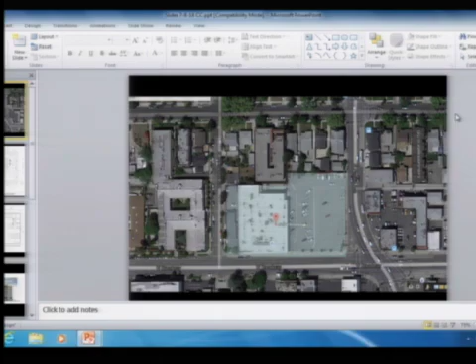The proposed project is a 5-story mixed-use building with approximately 18,200 square feet of commercial space on the ground floor and 180 multifamily residential units above, surrounding a central courtyard. The building is tallest at 5 stories starting at Broadway, then steps down towards the north to 4 and 3 stories adjacent to the multifamily zoned properties along Wilson Avenue.

The developer plans to request a density bonus for the project pursuant to SB 1818, and I need to make a correction to the percent of affordability as stated in the staff report. The developer plans to provide 5%, not 11%, for very low-income households, therefore qualifying the developer for 1 concession. In this case, the developer is requesting an increase in height and stories for the project, to 65 feet, 5 stories, where 60 feet, 4 stories are permitted.

So 5% is how many units? 180 units -- no, 5% of 180, so how many is that? Approximately 9. Thank you. Formal consideration of this request would be considered at the Stage 2 design submittal.

Additionally, the code requires 313 parking spaces. The project will provide 330, located in a single-level underground parking structure and at the ground floor. 2 vehicular ingress-egress points are proposed, one along Pacific Avenue and one along Broadway, that would access the at-grade parking level, and access to the subterranean parking will be provided from Kenilworth Avenue.

Staff recommends approval of the Stage 1 conceptual design review with direction to the applicant to further refine the project consistent with comments from the city's senior urban designer. This concludes staff's presentation. I'd like to turn the rest of it over to the project team, who will go into the project design in more detail.

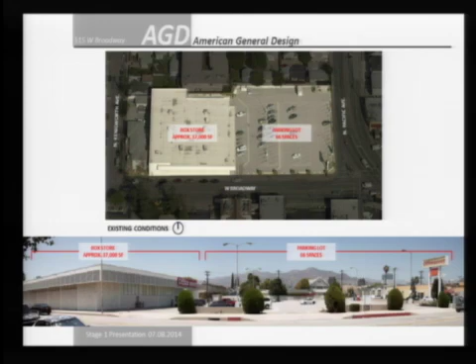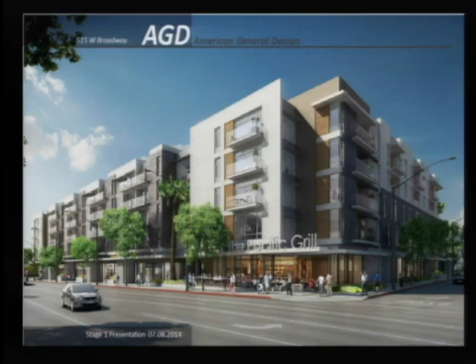Flip back to the first shot, talk a little bit about the overall idea for the project. All of these projects go through a long process of development and adjustments to try to make it fit with the local context as well as the development goals for the project. One of the things we really noticed on this site was the opportunity for an anchor and imagery at the corner of Broadway and Pacific. We really look at this end of the project as being much more in terms of commercial development, and we'll speak a little more about the residential development that's a little further down the block.

Just a little background information: the calculations lead us to 188 units, and in this particular configuration we would be allowed a 20% bonus, but we're actually using just about 15% of that bonus. The additional 8 units we found would make it quite difficult for us to step the mass of the building adjacent to the properties on the north of us. So we've eliminated those units from the project.

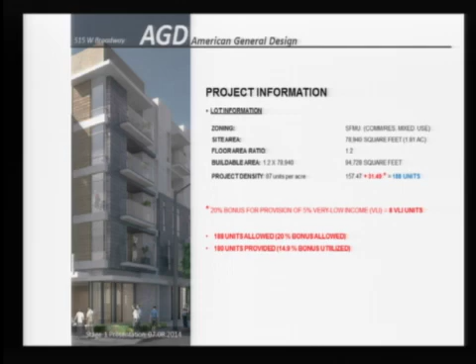Project program: you can see the overall gross area of the building is a little over 350,000 square feet, and unit count as it works its way through—I'll show you a little more detail on this. In terms of the number of parking spaces, as spoken by staff, we're required to have 313, and we're going to be providing 330 spaces.

The unit count we're looking at is 60 units. One thing to note is that in all of our developments we tend to go to a higher standard and higher quality in terms of the value of the property, with our 2 bedroom units being as large as 1,600 square feet.

The 1 bedroom units, which come in a number of different configurations, average around 900 square feet. The smallest studios are around 750 square feet, with the bulk being about 850 square feet, which we generally find to be the size of 2 bedroom units in most other competitive developments of this type.

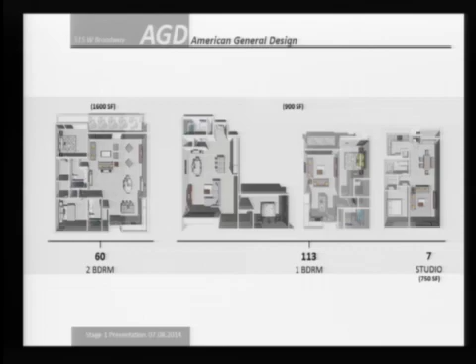The other thing to take a look at is the open space being provided. We're providing in excess of the required amount of open space, roughly two-thirds of an acre on the site. We find that's important for the community, and specifically for the quality of life of the individuals purchasing or renting these units.

Let's talk a little about our philosophy in terms of sustainability and the aspects present in this particular project. First and foremost, it's a mixed-use development. A lot of our background is in transit-oriented development, which we're doing in downtown Los Angeles as well as Pasadena. The idea of live, work, and proximity to mass transit is important to us.

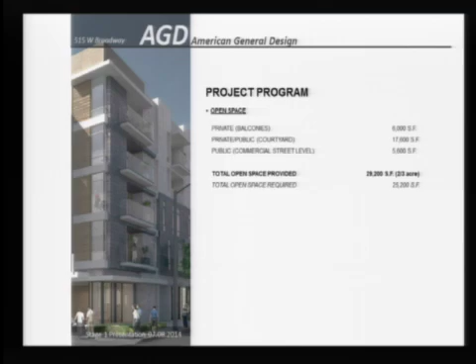While we don't have a train line here, we are along a major bus corridor on Broadway. We're looking at live-work opportunities as well, in particular some units along Kenilworth Avenue that are accessed from the ground floor.

Throughout the building we've considered sun control and solar aspects. The building has been elongated along an east-west axis, which is optimal, with deep recesses to shade the glass on virtually all sides of the building where we have the majority of our glazing.

All glazing is thermal pane, thermally broken, double pane glass, and we provide sun shading in various places where it's optimal to do so.

We look at virtually everything we do in terms of drought-tolerant California natives, and the reuse of gray water systems that feed into irrigation.

We also focus on using recyclable materials. It's common to see wood construction, but wood is actually a renewable resource and is recyclable. A lot of the lumber we're using in current construction is made up of small pieces, assembled manufactured lumber that comes from recycled materials. We're also looking at using metal paneling, which is a recyclable material.

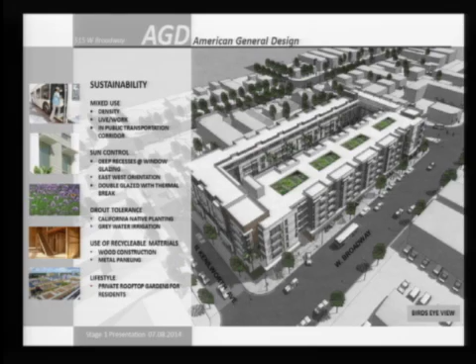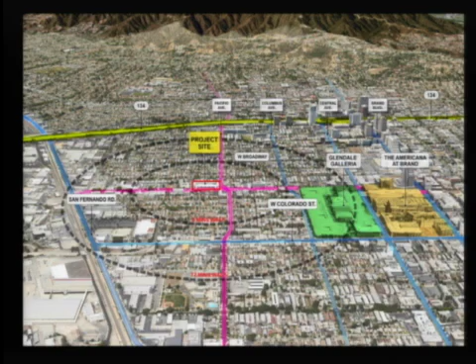Further, we've pulled the building back, and as we talked about, the loss of 8 units principally came out of the design in this area. We go anywhere from 9 to 10 feet, to 21 feet, and as much as 40 feet in terms of the distance, and we have another image that will show that.

Can I ask you a question? Sure. What is on that side? Excuse me, what are the buildings on that side? I'll show you an image in just a second that talks about them.

They range from single-family residences, where the garage is up against the back of the property, to rather significant multifamily residences backing up against it. So all the single-family residences have their garages between the back of the building and the property line. Right.

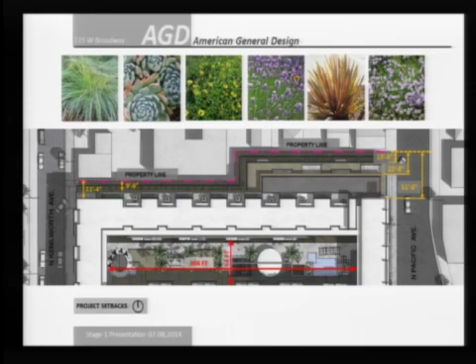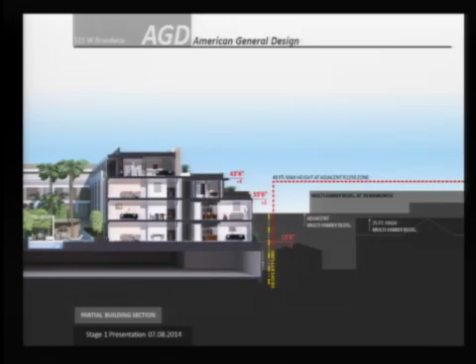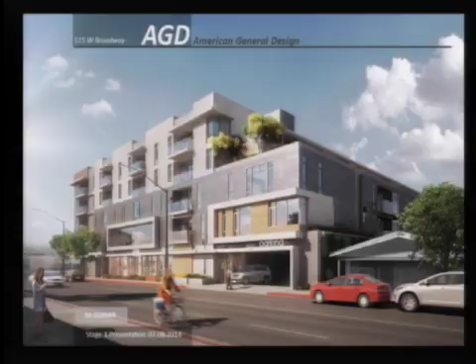Let's talk a little bit about how the ground floor plan is organized within this. We're actually looking at the commercial entrance coming in off Pacific. This is entry in only, will not be exiting back out onto Pacific. We understand the traffic constraints that are along Pacific. We have in and out both off of Broadway, down adjacent to where the residential portion of this is. See the commercial uses that wrap around, 118 parking spaces, and then a courtyard that goes through in terms of providing access from the parking back out to the street for each one of these retail components.

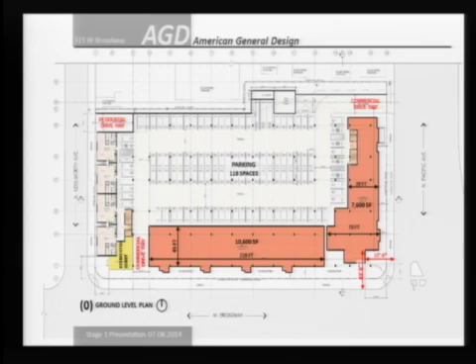One of the things I think is interesting that was able to be achieved on this site is that many developments we see have very token kinds of depth in terms of retail space along the streets. In this particular case, we've got everything from 45 feet down to, say, 30 feet. But we find these to be depths that are rather appropriate and are very leasable and sustainable economically in terms of tenants that would come in. And we're really looking at the corner of this in terms of having a major tenant come in for a restaurant cafe space with outdoor dining that we can see in the images.

Let's talk a little bit about our attitude along Kenilworth Avenue. Kenilworth is where we have our access down to the residential, so the residential access parking is completely segregated from the commercial. We have the development of 4 live-work units that are accessed directly off of the street along Kenilworth. We didn't feel that it was appropriate, with the convalescent hospital and other residential uses, to have commercial activities along Kenilworth. So this worked out well for us in terms of our design strategies.

Parking down below, parking access up into the units from 2 distinct locations on opposite sides of the site, and a ramp that goes back up to grade.

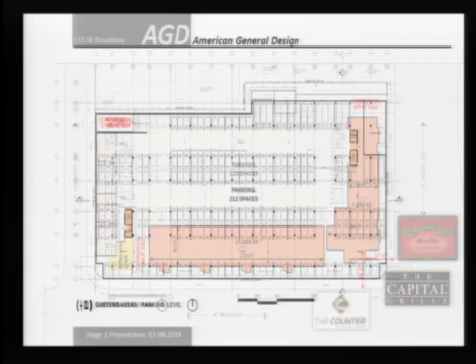One of the things that staff asked us to look at is that currently there's a right turn lane at the corner of Pacific and Broadway, and one of the things we have investigated is whether or not there's the possibility of filling that in and creating a courtyard that gives a little greater emphasis to the commercial development that would happen at the corner.

How much more time do you have? Like 2 minutes. Okay, 2 more minutes.

Kenilworth elevation. Just a quick note on materials. Since we do our own development, design, and construction, the quality of the buildings is very important to us, and the variety of materials we put into the projects matters. Of significance is that we tend not to use vinyl-clad windows or windows that sit flat along the surface. We like to recess the windows back to get lots of shadow and texture depth within the project, and this illustrates where some of the potential material selections will go.

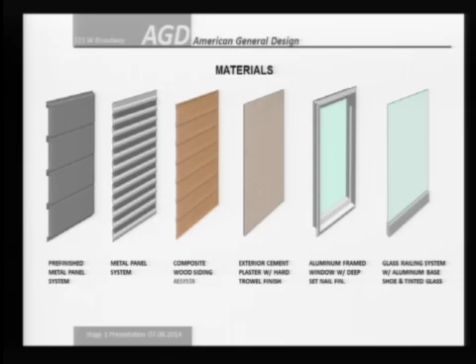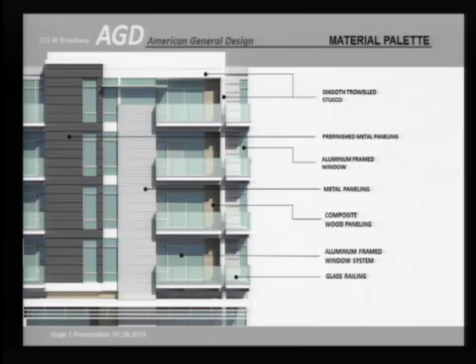Can I ask a question about your landscaping? Certainly. Why the palm trees? Why not something that provides some shade and some blockage so people aren't looking from one window straight across into the next window? Shade is not necessarily that big of an issue for us since this winds up being a fairly narrow configuration.

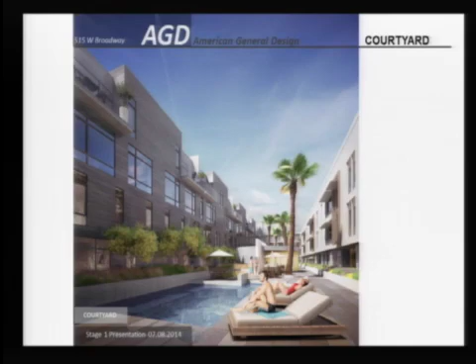What we've done is locate our planting along this side with species that can tolerate the shade, so we get plenty of shade principally across this side, and double that. It's definitely possible we could look at a different species that leafs out more, but in this case we prefer less ground shade and something vertical in the space, which helps break up the length of the space.

Well, I just think you should consider something that provides some greenery, because the palm trees don't - they're just like a telephone pole. And then you have your units right across from each other, so you don't really have any blockage from someone looking out one window. They'll look right into the window across from them. It's not very far, and it might soften your space to have some foliage when people look up or through that space. So something to think about.

Okay, well we could certainly consider deciduous planting that would allow us to get shade in the summertime, but then would allow us to maximize the light in the winter.

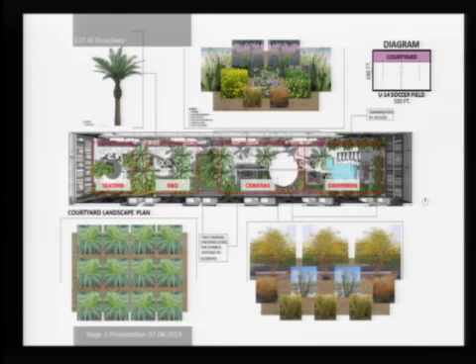Are you going to be able to plant? What's the depth of the planter box for you? Fortunately, we're in pretty good shape because we've got the parking deck below us, and we've actually got space for the swimming pool to have depth. So we're probably looking at a planter box that's going to be at least 4 feet, plus another foot or so above that around it. So we'll probably be looking at a 5-foot root ball at least.

Other questions I'd be happy to answer. No questions? Thank you.

This is the rear elevation, which I don't think you're addressing. Yeah, no, I'm not crazy about that. This is the Pacific elevation, the frame around that common recreation room I mentioned. Through the balconies, the rhythm of the balconies, and the ins and outs of the facade, this does relate to the front facade. What it doesn't have is the vertical emphasis that the facade on Broadway has.

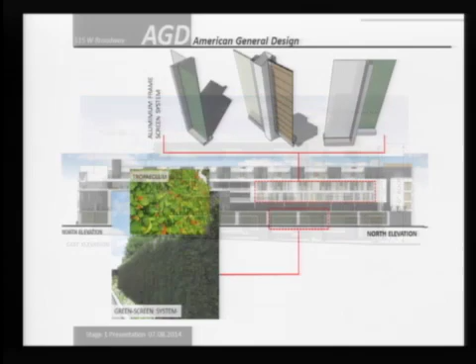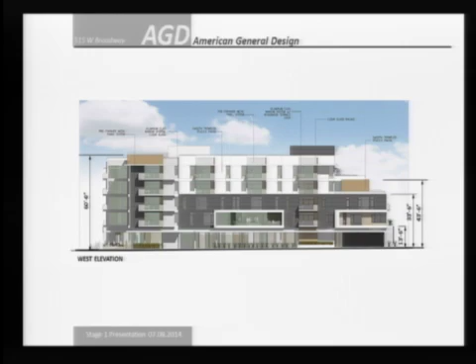So where's the south? Let me get over to that. Here you are. So here you have these ins and outs, these vertical recesses with balconies, these areas clad with metal cladding in those locations. Those are all the balconies. This was probably the hardest facade to detail because of the length of the building, and how important it was to avoid an overwhelming, looming presence. We thought they successfully addressed that through the use of materials and changes of plane.

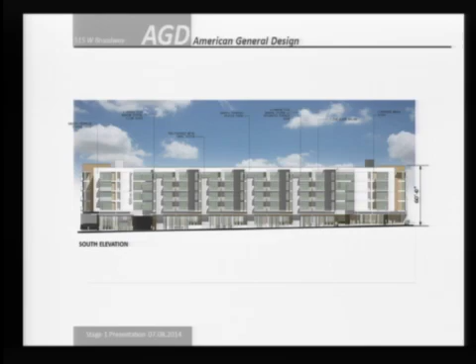So those are all... and you know, on a tangent, in relation to balconies, I saw on Central, on the Lex on Orange, someone hanging their laundry out over the balcony. Is that permitted? Do we have a code on that? I don't think so. I was really upset by that. We can put a condition in their lease agreements that it's not allowed, and I believe we've done that in the downtown projects. We can take a look on Lex and Orange.

Code enforcement. Okay, so you're saying that although they're different, they incorporate some of the same materials, and that doesn't bother you? No, because the material palette kind of... if it bothered you, you would say something. We wrote a nice report for you saying we support the project. We think it's actually a very thoughtful design, and we think buildings should respond to their immediate context with subtle changes. Maybe this isn't subtle enough for what you're hoping for, but we thought it was successful.

Okay, thank you. Mr. Jerry, Mr. Quintero? Yeah, I support the project.

I was right around the corner near the Homenetmen office for many years, so I'm very familiar with the site. I remember when it was a grocery store, and within it was a La Majun place I went to, where I'd try to talk him into going statewide with his wares, but he never did. So I think this is an upgrade. I like the design, and the fact there's quite a bit of commercial. I think that site will absolutely support the commercial, and if you can get a restaurant in there, I think it will do very well and improve the ambiance in the neighborhood.

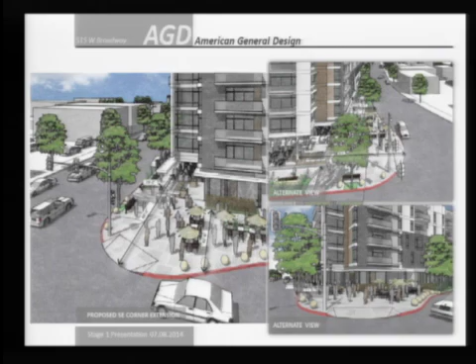I'll move 3A. Second. Roll call, please. Council members: Friedman? Yes. Najarian? Yes. Quintero? Yes. Weaver? Aye. Mayor Sinanian? Yes.

Thank you. Next item on this agenda is closed session.

4A is conference with legal counsel, anticipated litigation, initiation of litigation pursuant to paragraph 4 of subdivision D of Government Code section 54956.9, one case. B is public employment, attorney. C is conference with labor negotiators. Designated negotiators attending closed session are Scott Ochoa, John Tocatalian, Michael Garcia, Jillian Van Meiden, Matt Doyle, Robert Castro, Carl Povolitis, Steve Zern, Ramona Boeg, and Robert Elliott. The names of the employee organizations are Glendale City Employees Association, Glendale Management Association, Glendale Police Officers Association, IBEW Local 18, Unit 40.

Thank you. Yes, Mr. Garcia, do you expect to report on any of these? Mr. Mayor, on item 4B, we anticipate reporting.

And where are we going to meet? We're going to meet behind, behind the little room? Okay, recess. Okay, recess.